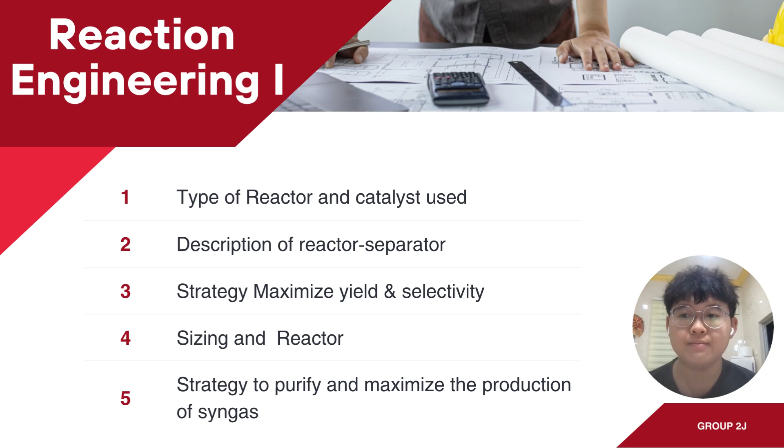The reactor we choose is a packed-bed reactor, PBR. One PBR is used in steam methane reforming (SMR), and another PBR is used in the water gas shift reaction (WGS). The reason we use PBR is because it is the most suitable reactor for reactions involving a catalyst. PBR can hold the solid catalyst in the reactor to prevent it from flowing out with the product. PBR will also increase the reaction rate due to more contact during catalytic reaction and has low operating costs.

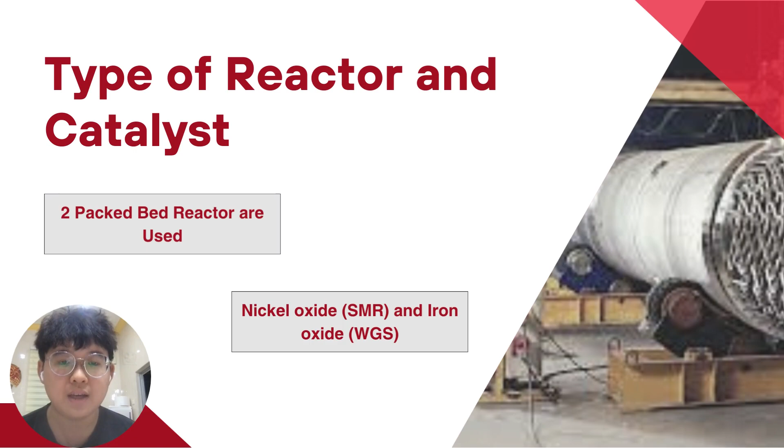The catalysts we use are nickel-based alumina catalyst for SMR and iron oxide catalyst for WGS process. The presence of a catalyst can increase the rate of reaction.

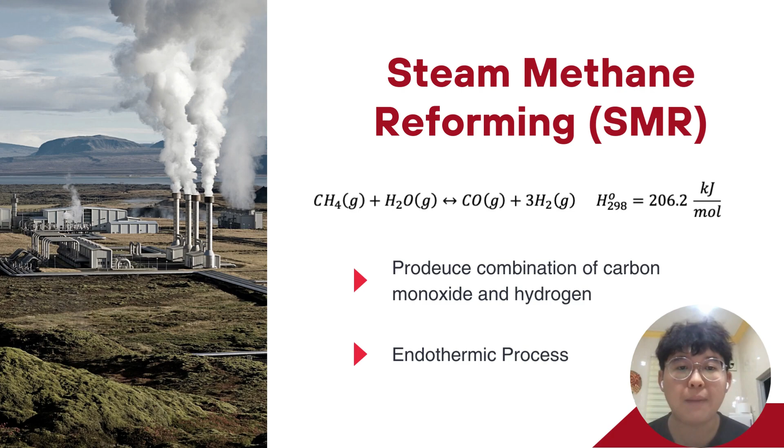Now I will explain how the system works. The system is divided into two parts, SMR and WGS. First, for the SMR process, the methane in natural gas is heated by steam to create a combination of carbon monoxide and hydrogen. Because the process of steam reforming is endothermic, heat must be added for it to progress. For the water gas shift reaction, carbon monoxide and steam are reacted to create carbon dioxide and more hydrogen. The objective of this process is to increase the production of hydrogen gas.

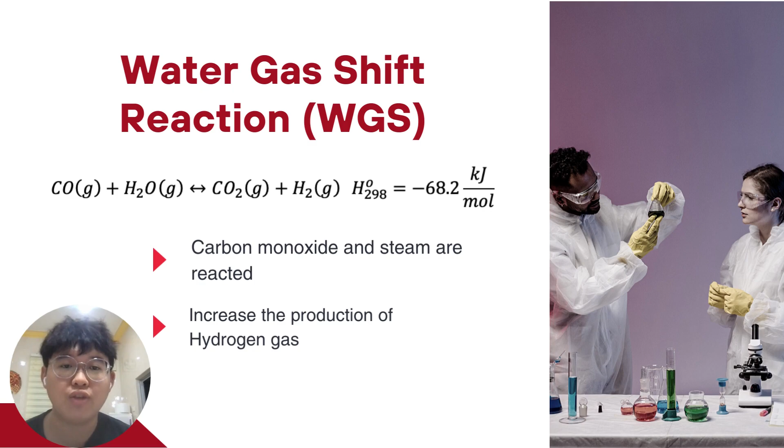For the strategy to increase the yield and selectivity: first, decrease the inlet pressure when temperature is constant. Second, increase the concentration of methane. Third, increase the temperature of the SMR reaction. And last, decrease the temperature of the WGS reaction.

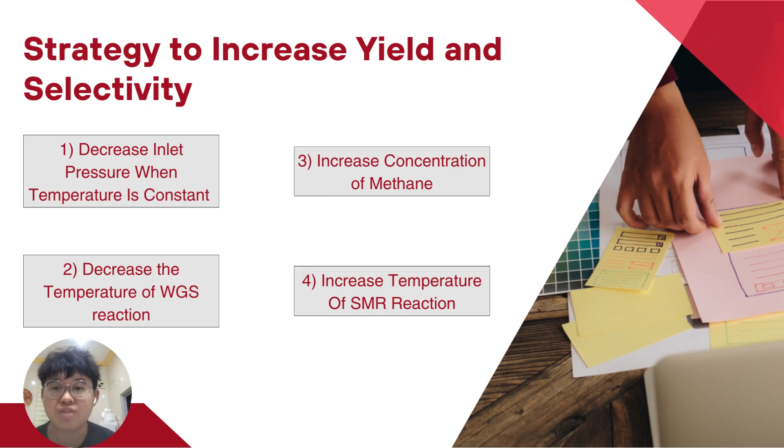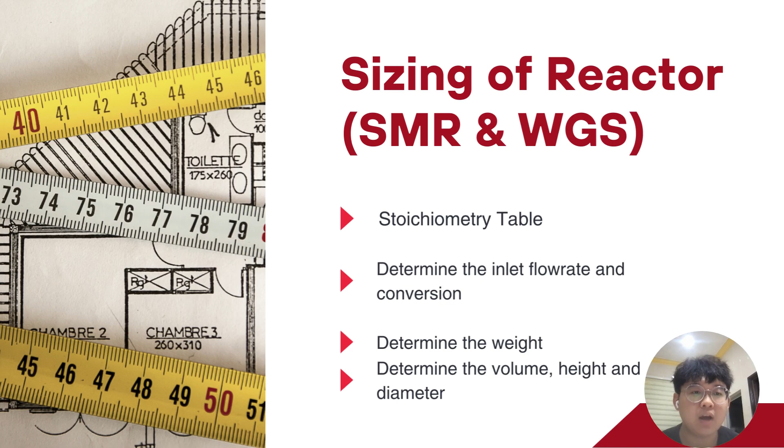To propose the sizing of reactor for SMR and WGS, we need to do the stoichiometry table. Inlet flow rate and the conversion of the reactor are determined using a journal we found. We use the stoichiometry table and calculation to determine the weight of catalyst. After getting the weight of catalyst, we are able to find the size, volume, height, and diameter of the reactor. The detail of the calculation is included in the report.

Next, I will present strategies to purify and maximize the production of purified syngas from crude products coming out of the reactor. First is gas cleaning. The system did not include a gas cleaning process before entering the reactor, so the molar flow rate of undesired components like nitrogen and methane exists in the total molar flow rate of the system, which can reduce the purity of the syngas. However, the reaction included in the reactor in the system successfully increased hydrogen production, and the fraction of undesired product only had a small percentage inside the system.

Number two, catalytic conversion. When the gas passes through the WGS converter, the iron catalyst will cause a chemical reaction that converts part of the harmful carbon monoxide into the less harmful gas, carbon dioxide. This is because iron catalyst is a common catalyst in industrial processes for the Fischer-Tropsch process to convert syngas into liquid fuels. Number three, temperature and pressure control.

However, the pressure in the system for both reactions is kept constant throughout, because when increasing the pressure in the reactor, it will increase the yield of the syngas, while reducing the pressure improves the purity of the syngas. Both important elements are very crucial for production, so to maintain the stability of the product, the pressure in the system does not change throughout the processes.

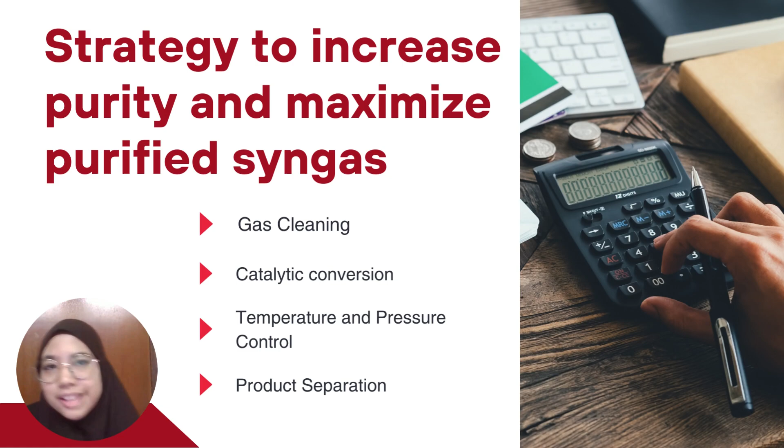Moving on, let's proceed with the process modeling and simulation part. First and foremost is the simulation part. Here, the natural gas from stage 1 is mixed with another water stream and goes through a heater and compressor to meet the required temperature as well as pressure.

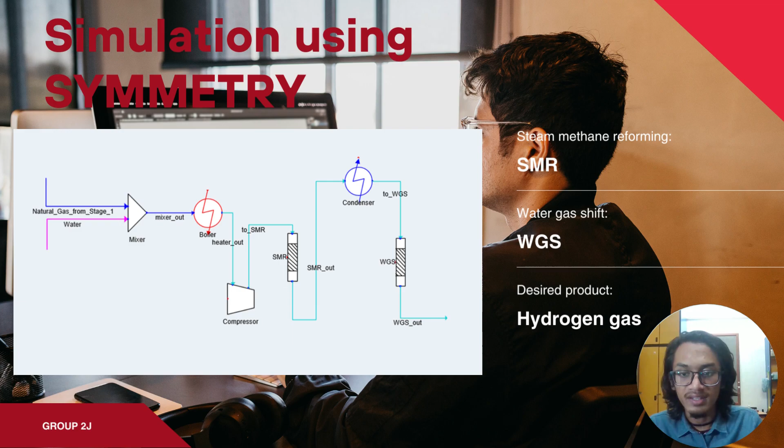Next, the mixture will go through the first PFR, where the first reaction of steam methane reforming occurs. Then the outlet will go through a cooler to decrease the temperature. After that, the outlet from the cooler will go to the second PFR, where the second reaction of water gas shift occurs. Lastly, the outlet here is the final product that we look forward to.

Now let's see the error between manual calculation and simulation. As we can see, the percentages are quite big here. For example, we take the production of hydrogen, expected to be around 2116.8 kmol per hour, but in experimental only produces 677.19 kmol per hour.

This occurs because of the different type of reactor they use. Here, PBR is used for manual calculation, however PFR is used for simulation because there is no PBR in the simulation software. Next, maybe it's also because of the difference in sizing, or we call it the volume of the reactor used.

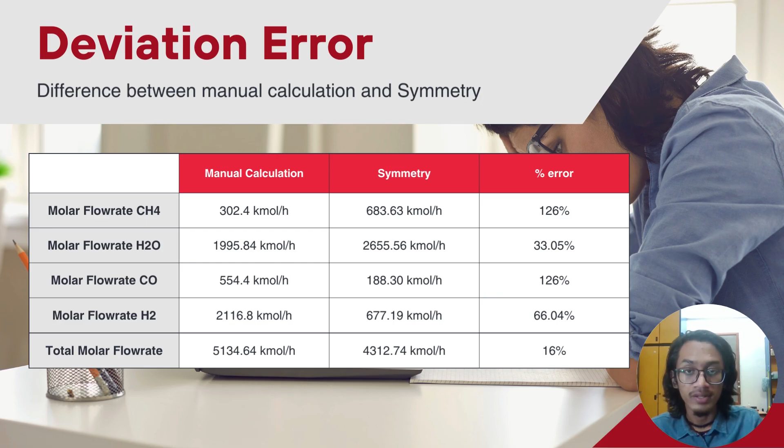Finally is the sensitivity analysis. There are three independent variables involved here. First is pressure: when the pressure increases, the flow rate of hydrogen produced increases. Next is temperature: when the temperature increases, the flow rate of hydrogen produced also increases.

Last is feed flow rate. The flow rate of hydrogen produced increases with the increment of the feed flow rate as well.

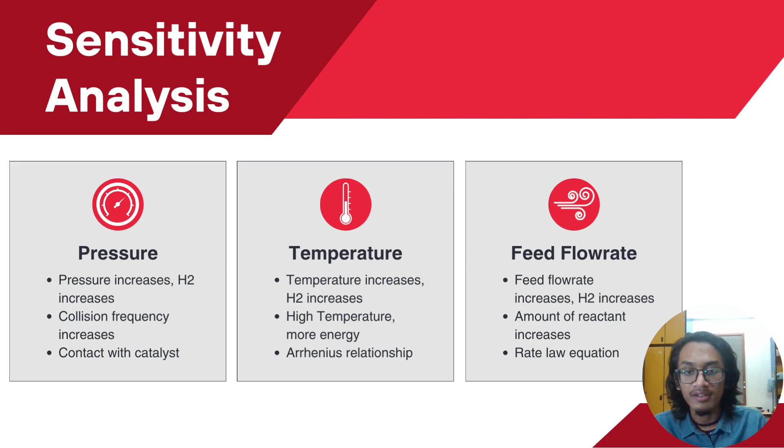Okay, next we will proceed to chapter 4, separation process. In this chapter, we are focused on designing gas membrane separation.

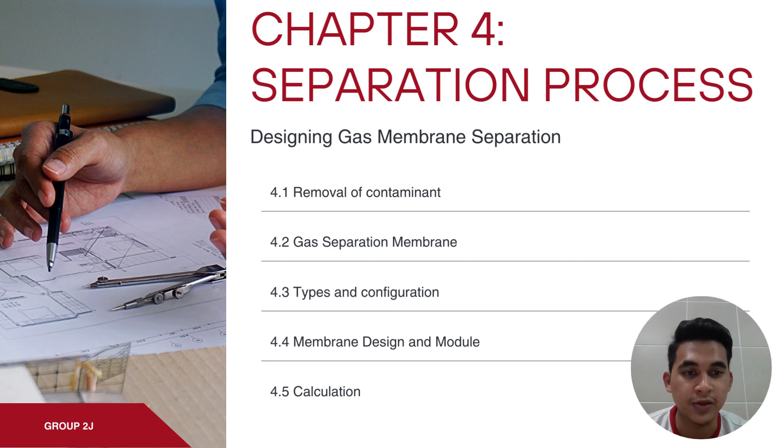In 4.1, removal of contaminant. Membrane separation process is influenced by many factors such as pressure ratio, permeability, stage cut, and selectivity. In pressure ratio, the flow of a component across the membrane can only occur if the partial pressure of the desired component in the feed is higher than in the permeate.

Permeability is a property of the membrane that allows the passage of gas molecules in the presence of a pressure difference. Next, stage cut reflects the amount of gas permeated through the membrane. And the last one is selectivity, which is the ratio of gas permeability.

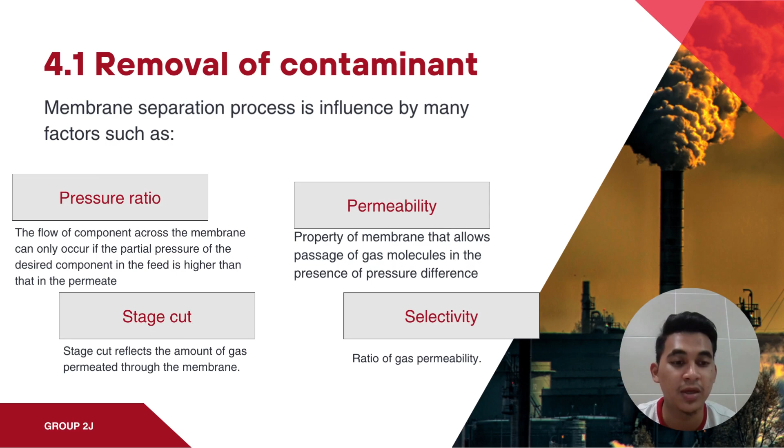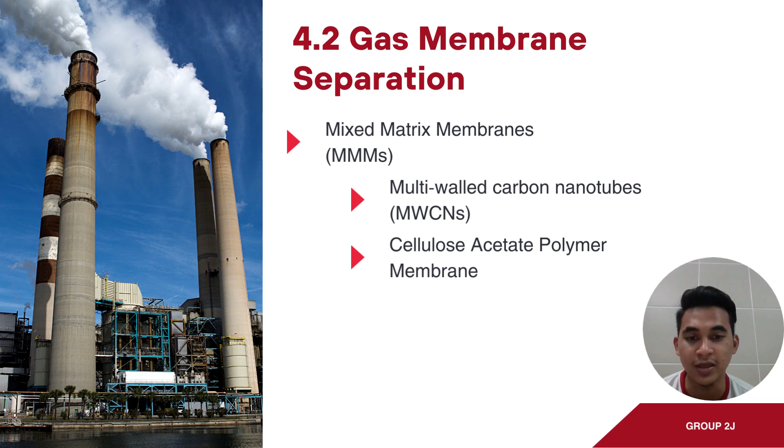In 4.2, gas membrane separation. Among all the membrane materials that we have discussed, the best method we found is the mixed matrix membrane, where it is utilized by combining the multi-wall carbon nanotube and cellulose acetate polymer membrane. This combination is perfect because it will build a membrane module with higher selectivity, high resistance to plasticization, and increased purity of the selected product.

Next, we will move to 4.3, types and configuration. As a summary, each configuration has its advantages and disadvantages, and the appropriate configuration should be chosen based on these factors. As you can see on the slide, the configurations marked in green are the most appropriate membrane designs; tubular and hollow fiber have the most appropriate design.

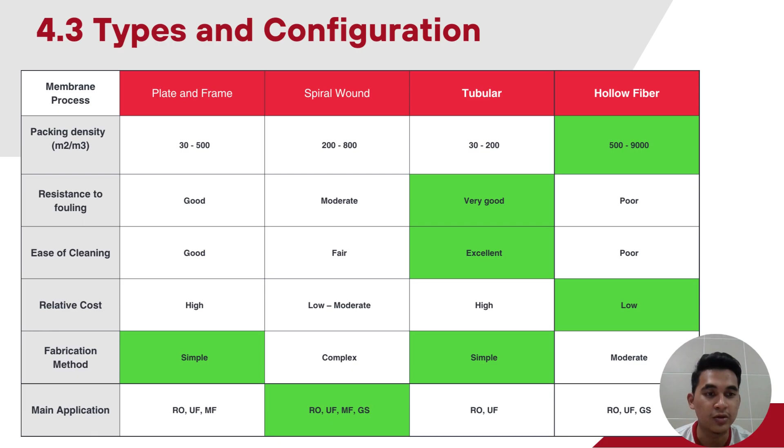So from here, we are choosing the hollow fiber because of the relatively low cost. Therefore, hollow fiber is very suitable for our membrane design rather than tubular.

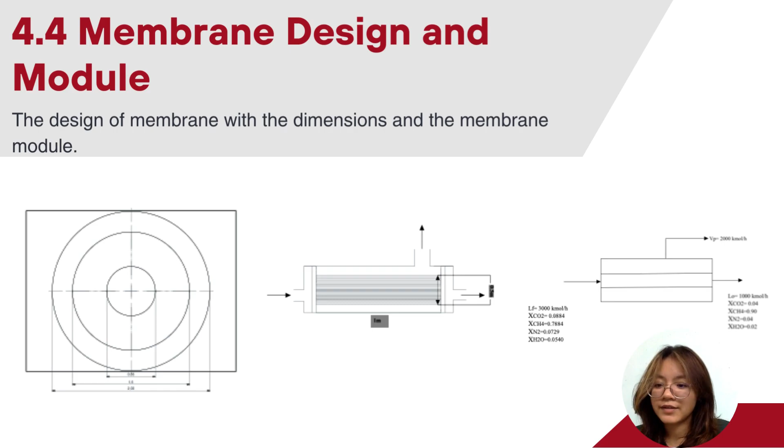The second figure is the membrane module with a length of 1 meter and the thickness of the membrane is 0.5 meter. The third figure shows the block model of the membrane.